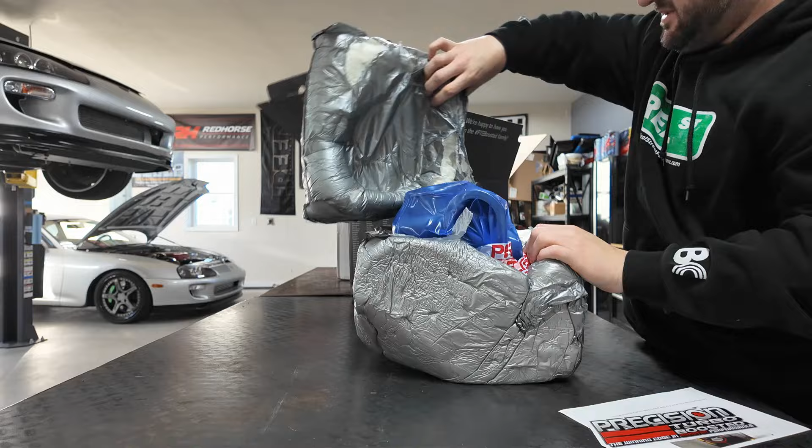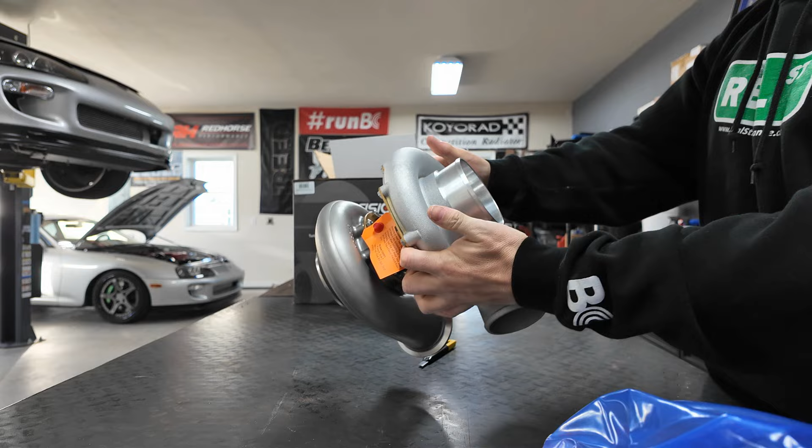Big old box with a Precision in it that won't cut open because this knife is dull. And I probably need a new one. Why won't it, what the heck? Oh, is it glued too? Boy. Set that down nice like.

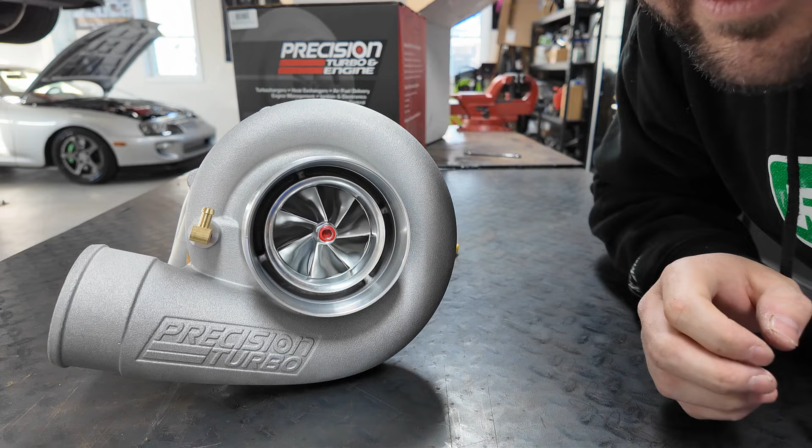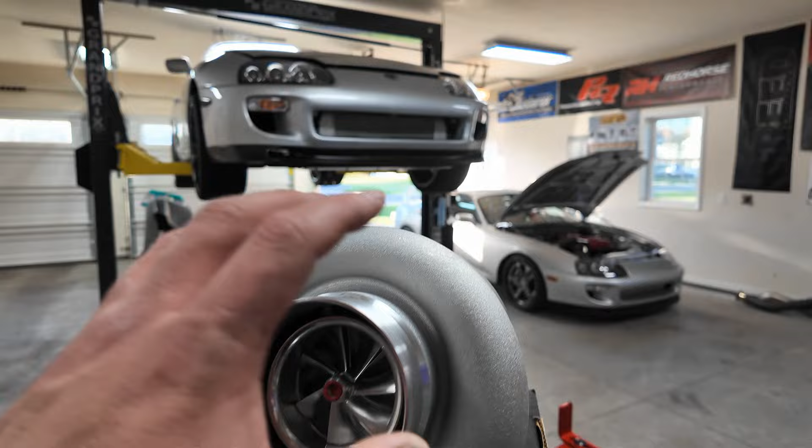See that right there? See that? That is my new 6870. Sheesh! So here it is, guys. Precision 6870 using a 0.96 exhaust housing here. As you can see here, what's coming around this side right here, this is a V-band setup. Very, very excited to get this on the car and try it out. Oh man, I'm just ready.

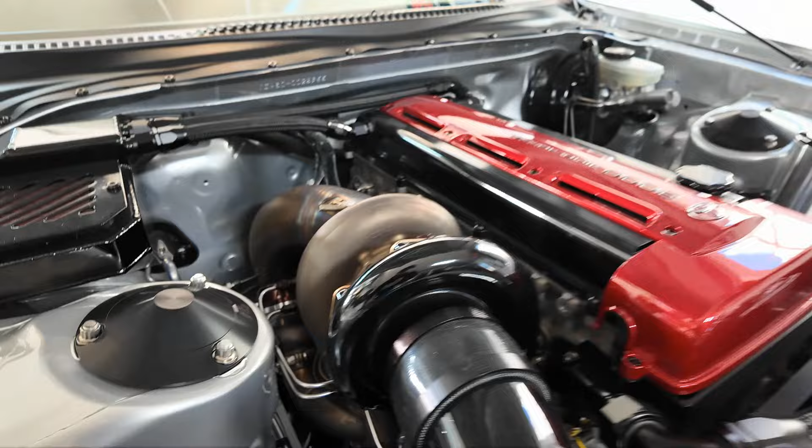Again, it's going to be very similar to what I currently have in the Supra. This is going to bolt up to what I currently have. So if we come over here, it's going to be very, very similar. This is the same style housing. This is an H cover with the same rear housing here, 0.96, but this is a 7675 Gen 2 versus the new one is going to be a Next Gen.

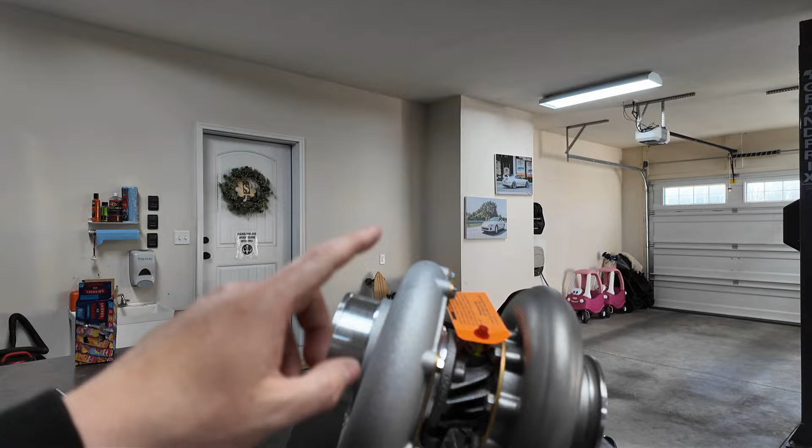Now, power rating. This is rated for 1300 horsepower. The new turbo is actually only, I love saying this, only rated for 1200. So I lose about 100, but the new tech allows for one, it's much smaller, so I'll get way better low end. And apparently this is pretty well on par with that. Again, it's not quite up there. Goal is to make just 1,000. I was making a little bit more steam there when I had that car on 40 PSI, but this is awesome. I'm pumped for this.

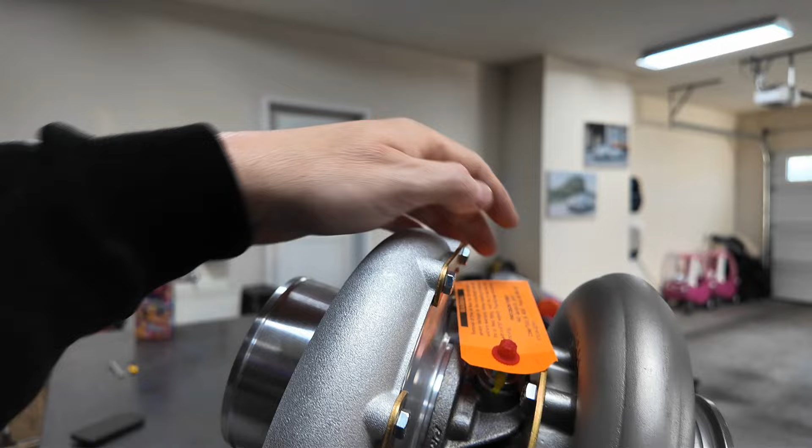So look at this. I cannot wait to get this on. But housing's got to come off. I got to go get it taken down and get powder coated at Bagworks down in West Virginia. So I was going to take it all apart tonight, but I'm actually going to drive this car down there tomorrow and maybe talk to Rob and those guys down there and kind of go over a few things.

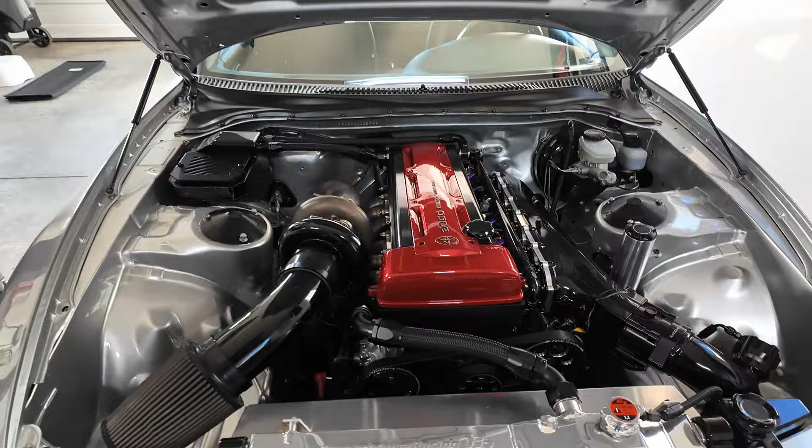Because, man, like this car, look at it. I absolutely love this car, and I'm actually loving this camera right now. This makes it so much easier.

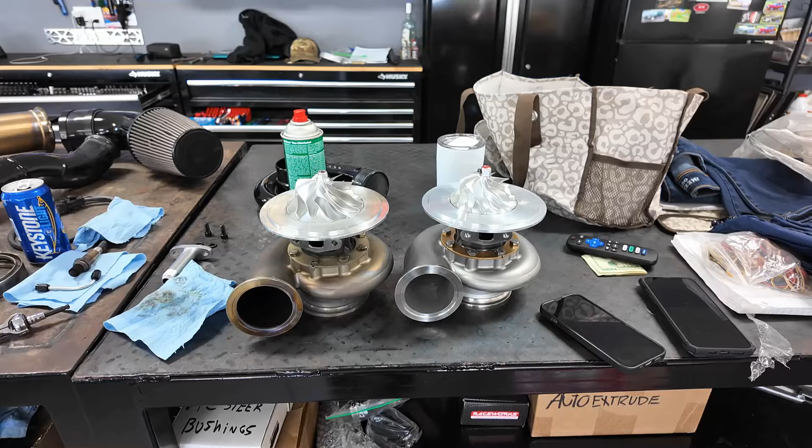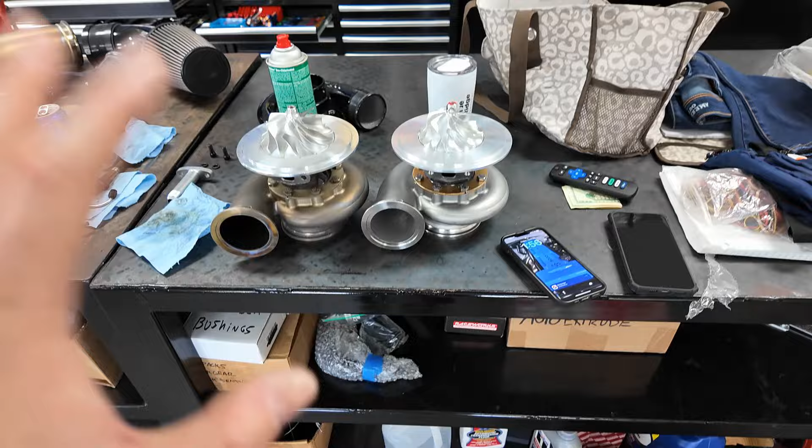All right, guys. So here is the two turbos. Old one, new one. The one thing I'm going to show you right off the bat here is, see if we can show you here, 0.96. I did not change the rear exhaust housing. Why did I not change that? Big reason is I wanted to have as much flow as possible to keep this eating up top. So I didn't want to sacrifice anything.

And I think that was a big reason why this probably didn't do as well. If I had downsized this it would have helped a good bit. But by keeping this large, I think it's going to help me keep it up top happy, without going too small. But if you literally just look at it here side by side, you'd see how much bigger this is. I'm just trying to see the difference in fin design, but it looks super similar to me, but they're saying this thing makes another 100 horsepower.

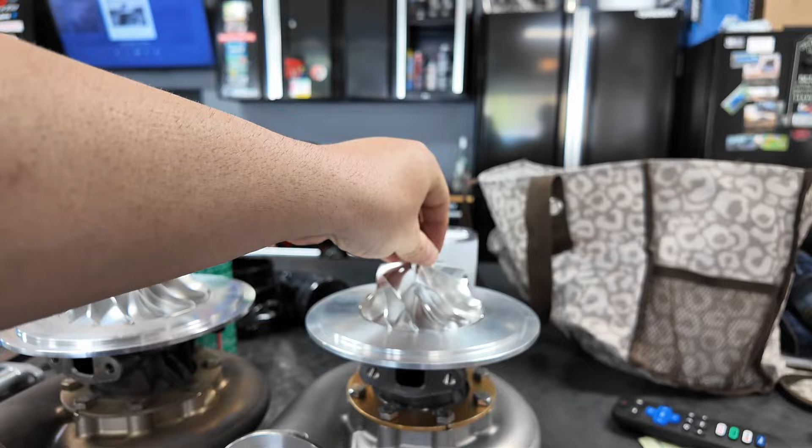So yeah, I mean, it's all very similar. Again, this all bolts up. The front housing is a little bit different. I just dropped that off, obviously, with Rob down there at Bagworks. So yeah, the port's even still a square port on both of them.

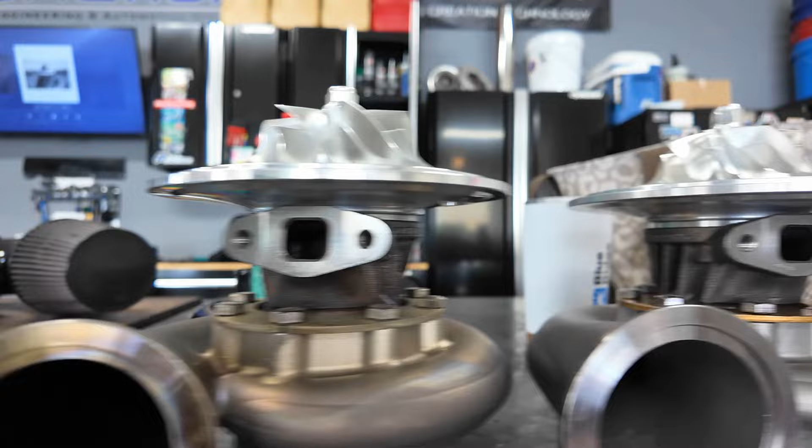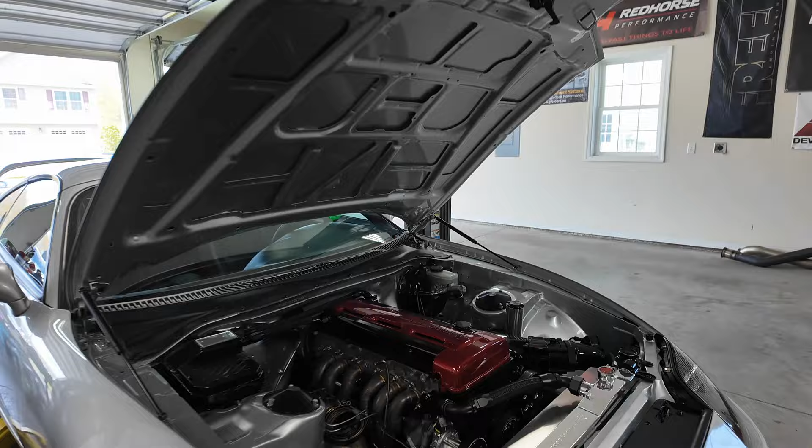So yeah, I mean, they say the center section is a little bit different, like the fin design, but it looks super similar. So I'm gonna go ahead and bolt this up, get it ready, get my downpipe, everything else back on. It's cool. You can see the Powerhouse Racing header here. Must have had like a baby leak from something, but I think I'm gonna clean some of the stuff up while this is all off too.

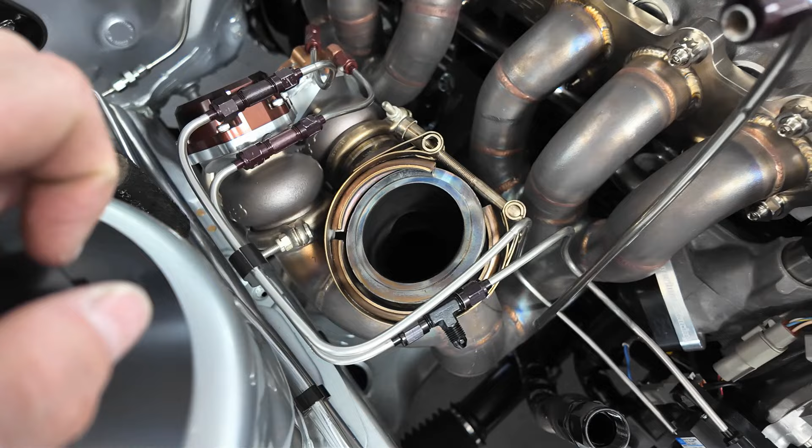But yeah, you can see my one Go Fast Bits wastegate there, getting a little bit of heat in it. I mean, yeah, she got a little toasty, but no leaks. What I like is this right there. See that? See, no leaks around that V-band, which makes me happy because everyone says V-bands leak, this, that. Male to females never leak. That's why I like that design. So I wanted to show that there was no leaks at all.

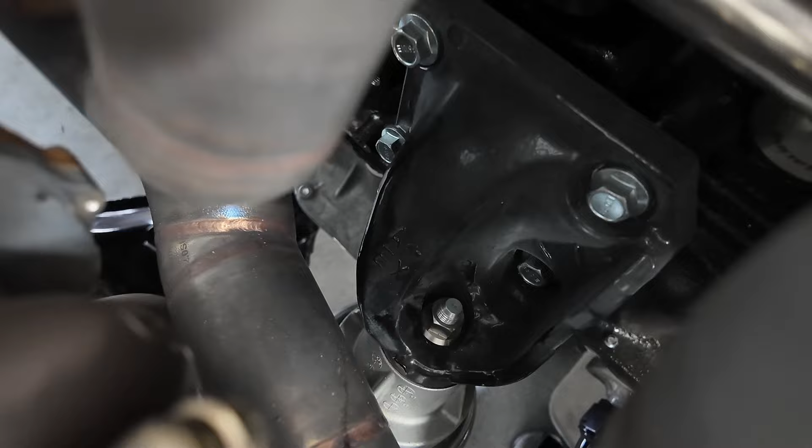Makes me super happy. But again, I'm going to get my brush out here and clean a few things up while I've got access to it all and clean up that engine mount, which you guys, can you see it down there? Damn, the low light on this is 10 times better than my old camera. Got a little crusty just from being down there. I got 6,000 miles. 6,000 miles on a quote-unquote race engine, and it hasn't skipped a beat.

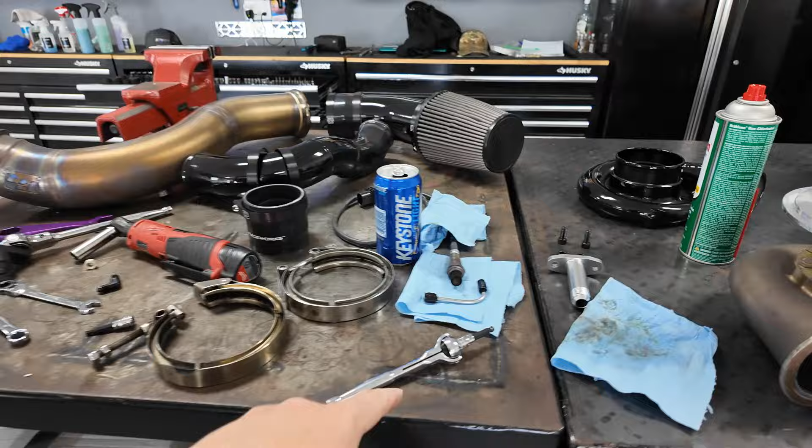Tom Barbosa, you the man. This thing is awesome. Drove it today. Drove it down to take it to VagWorks. Like, this thing is just, it's so reliable. You hear for years from people hating standalones, everything else. I've been very fortunate. So anyways, I digress. I'm going to put on my long drain neck here, get everything bolted up, and get it back on the car. All right, so I'm headed down to VagWorks right now.

I've got this new microphone on my lapel, or I guess whatever you call that here, and I've got the window down. So just curious how this works. I was going to use the internal mic inside this thing, but I don't think that was going to work out. So I'm hoping this smooths everything out. Again, it has a built-in gimbal. But yeah, I just want to take it for a little ride, see if the window goes up.

Here's another fun thing. I never get to show you guys this stuff, but the window. I can't figure out if it's the regulator or if it's something else. Just for the fact that sometimes it works, sometimes it doesn't. I gotta click it down, click it up. If the door's open, it doesn't work, but if I shut the door, it works. So I'm assuming it's wiring or something dumb, but I checked all the wiring and it all seemed all right, but it's gotta be maybe a cold solder issue.

I want to replace the window switch. I was gonna have a gentleman named Josh Beaumont, I think that's how you say his name. He's down in Texas, but I found out you can buy the window switch still brand new for like 45, 50 bucks. So instead of even dicking around trying to fix what I have, it's like, screw it. For 45, 50 bucks, I'll just buy a new one and save myself some headache here. And again, this is the reason why I'm going down today too.

As you can see here, I live in the mountains, so it's just twisty and turny. We'll get some straight roads here eventually, but it's nothing like it is down south, not even close. Transmission's still cold, so that's why there's a little notch there. Once it gets a little bit warmer, it'll be better. I had really thick fluid in this, and it was bad. Now this isn't horrible at all, but yeah, I'm just excited to get this thing powder coated and see how this looks when it's all done. I'm ready to drive it with the new turbo. I wanted to drive this down though, just because it's a beautiful day, so I don't want to take it apart and regret it.

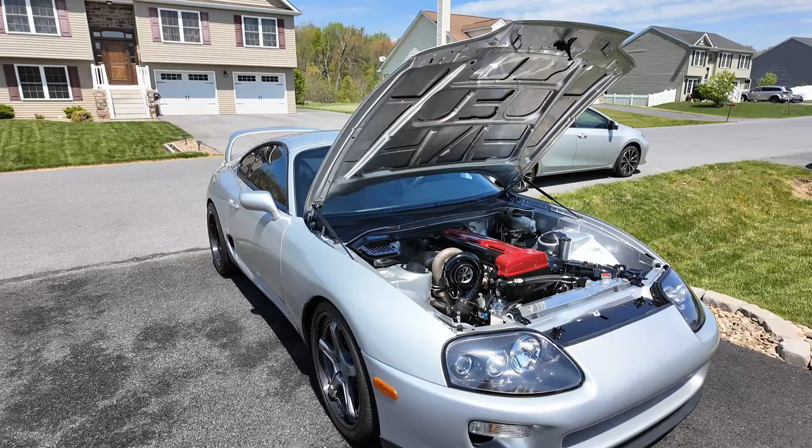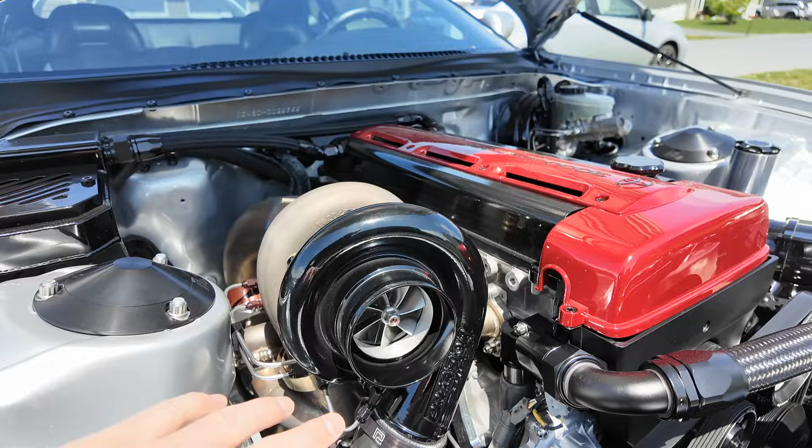Well, just got back from VagWorks there. Before I take the turbo off, I love when we did this, like, I don't know what you call this, but the full blackout. So everything inside is the reason the new one's not going to have this, for the fact that I'm eventually going to get it machined. When they do that, all this is going to get tore up or cut up. So I didn't want to do it yet. I'll probably take it back and get it repowder coated, but I at least got to have it black, because I love when I go to a show, I always take the filter off and it just looks better. It takes a lot more.

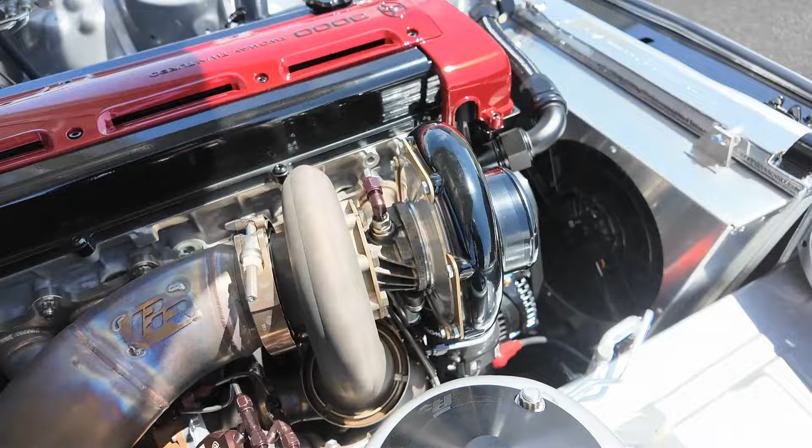It's a real pain in the ass. He even said too, he's like, dude, it sucks doing it. So I was like, yeah, this time around, don't even worry about it. But yeah, about to take the turbo off, but look at that. V-Band is so much nicer. I can't wait. So I'm gonna shut up. Let's pull this car inside and get the other one out.

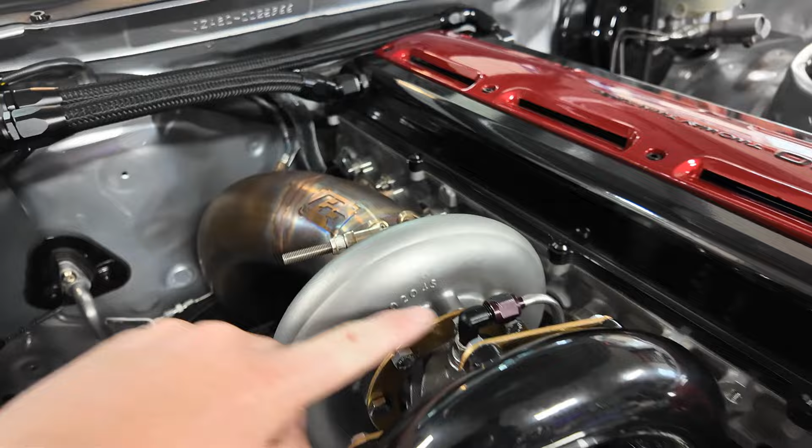All right, turbo is back on. I kind of like going back to this. It actually looks a little bit cooler here, but new turbo's on again. Doesn't look any different really, because it's like the same size. It's literally internally, so it's very similar. I did put a new fitting here just because over time aluminum can weaken. So I did put a new fitting on it.

Yeah, looks awesome. Again, this thing is supposed to be pretty awesome. I guess I'll start it up here. Already primed the turbo. I want to check all the bolts one more time, make sure everything's completely tight, and then let's go ahead and fire this old girl up.

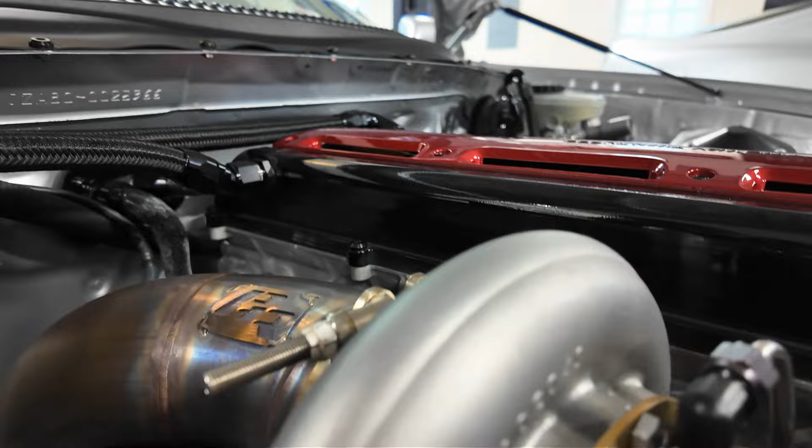Okay, but this is definitely going to burn off quick, so it's going to get a little smoky. All right, ignore the funnel here. I'm actually changing the oil. Try to change it every 1,000 miles. I know that seems excessive, but oil is cheap, in theory. I've got a ton of Toyota filters. Engines are not. So, changing out the oil, but I wanted to go over the turbo, and I'm going to go inside and go over how it is performing.

This thing is a light switch, guys. This is the street turbo. And maybe a 64, 66 would be even crazier, but it's going to fall off even more up top, which is something I'm going to talk about here today. I'm going to try and remedy it, but I'm going to have to go inside and show you guys that. Just to give you perspective though, I'm hitting 36 PSI at 5,000 RPM with an unideal setup. For a low range car, you'd want smaller cams and everything else.

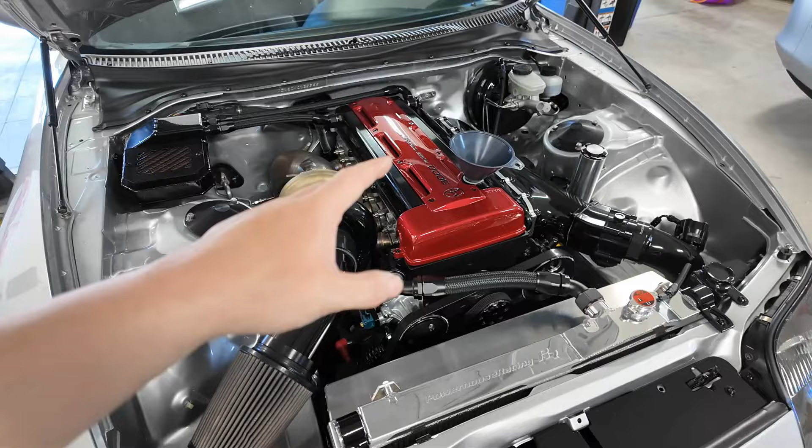So I'm running an open scroll manifold with a V-band, pretty much open scroll. I'm running large 276 cams. This has a high peak and lift. I'm running a large manifold, large plenum with a short runner. Again, high peak, not low. Large intercooler piping, large intercooler in itself. And I'm running a large exhaust housing, which is good for top end, and 4-inch exhaust, which does help there, but not perfect.

36 PSI, 5,000 RPM, meaning that's hitting my target. It's probably making about 950, 1,000 at that. So the goal is to hit 40. Maybe I can go a little bit higher. 40 should net me about 1,050 in this; I wanted over 1,000. I'm going to get on the dyno. Might have to play with timing a little bit. One thing I'm noticing though, it's falling off up top again. I'm not going to get too much into that here because I want to go inside and show you guys the logs and explain that a little better.

Before I go in though, I have to explain, when I get on it now, the car picks up like it's just brum, brum, brum. Before, every time I shifted, if I didn't shift really high, it just wasn't a great powerhouse. And the one thing I would say, up top, it definitely doesn't steamroll. It does, but it doesn't. You know, 90% of people get in the car, if I take a video, you'd be like, good Lord.

But I can tell a little difference just for the fact that I took the 7675 off and put this right on, so I can tell the noticeable difference, but it's very minimal. Obviously the other turbo is worth another 100 horsepower. This is 100 less, but I feel like this gains a lot. Nothing wrong with the 7675. The 7675, I've got it here, 7675 Gen 2 with a 0.96 V-band housing.

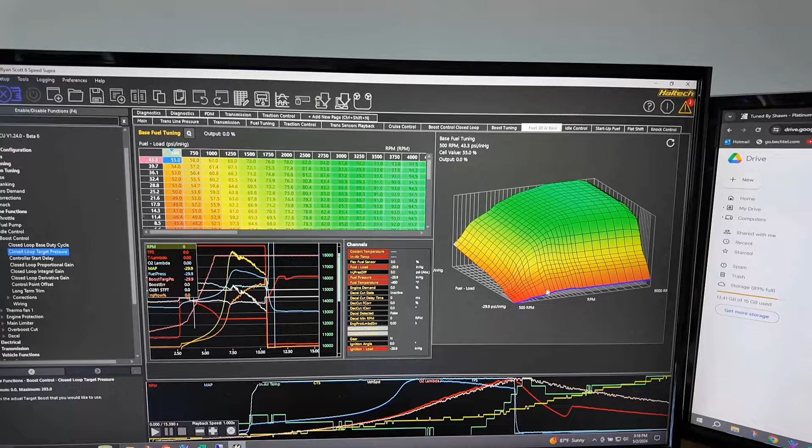All right, guys. So let's go over a couple of things here. So this is my boost tuning page. I made this, that's why I like Haltech. AEM does it too, but I made a couple like this one. Here's my fuel 3D base, I call it. So when I make base fuel, I like being able to see the map versus also the physical fuel load map here. Then I have a few things in here that you want to check when you're checking for fueling. But I digress. Let's get to the boost tuning page here.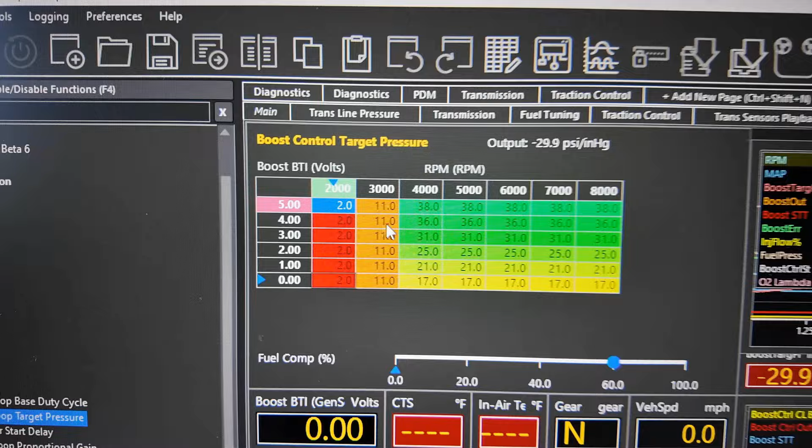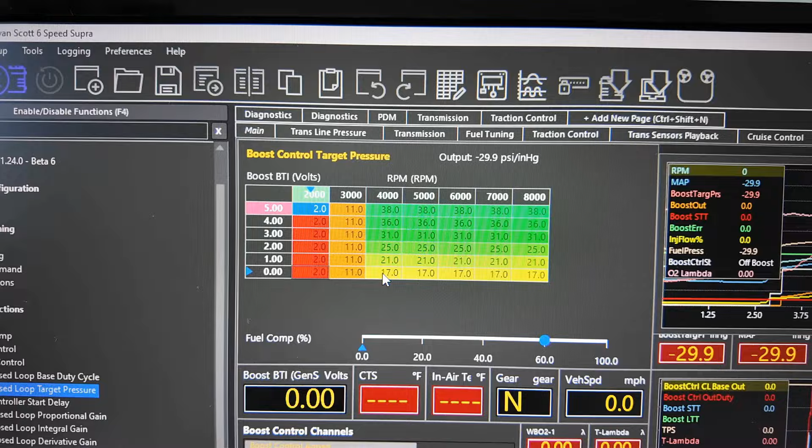So we come up here to the very top, see if this focuses for y'all. But up here, this is my levels for my BTI gauge, which is my switch. So you got 0, 1, 2, 3, 4. 0 is pretty much gate spring, which actually my gate spring is like 15, but this is pretty much set. So if I just want it as low as I really want it, or like 93 pump gas, which will switch automatically. 21, 25 is like the low if I'm letting a friend drive or something.

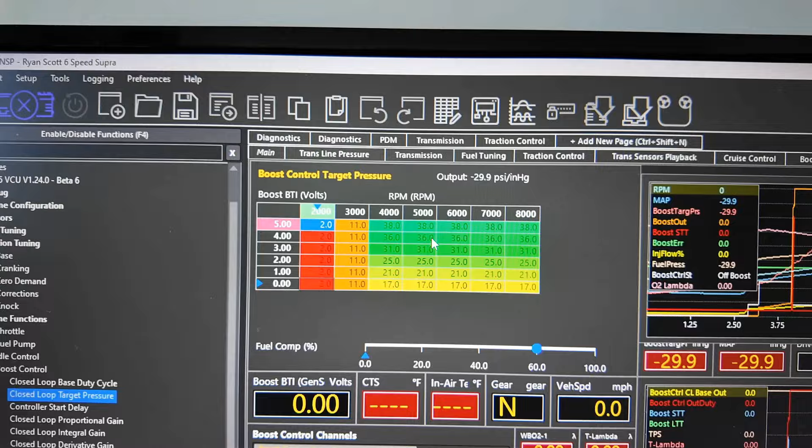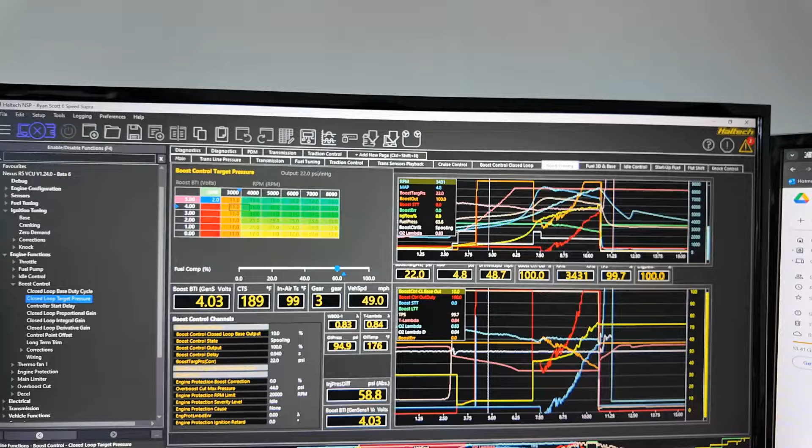31, I really like it at that level. 36 is really fun. And next up is 40. I don't know why it's 38 there. I just uploaded a new one, so this must be the old map, which it is because it's my old log. But let's go over this here. So let's do this. Let's window over it. Oops, so if we can see down there, we window over it all. Makes things a little bit tighter.

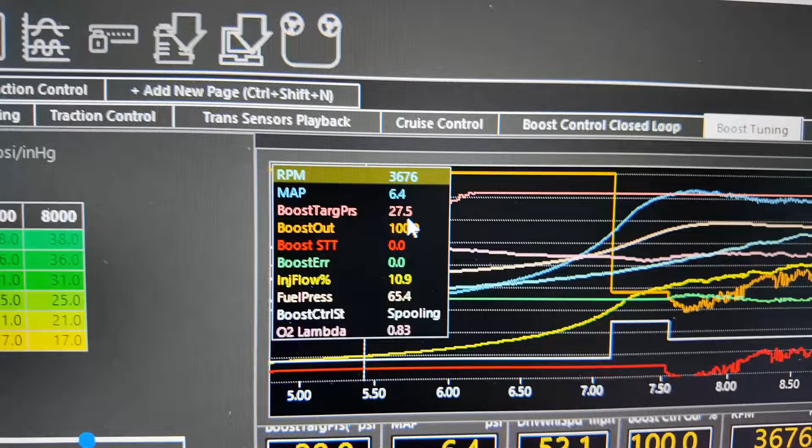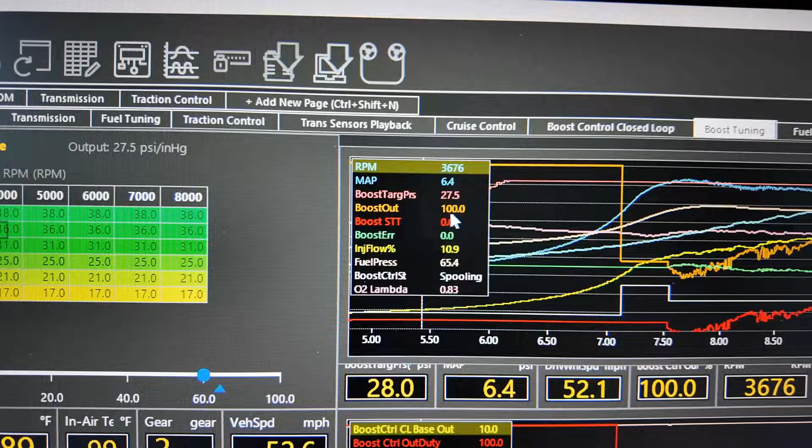So let's come in here. We'll look up top here. So as I drag this across here, you'll see we've got RPM, we've got MAP, we've got our boost target. So as it comes up, this target will go up, and that's what it's telling us we want to go to. I'm on level 4 with this. Okay, so obviously we're targeting 36 PSI. So boost out is the physical MAC valve saying the amount of pressure percentage-wise going out. This short-term trim, this is the boost error, meaning like, hey, you're trying to hit 36, but the error is either negative or positive of that.

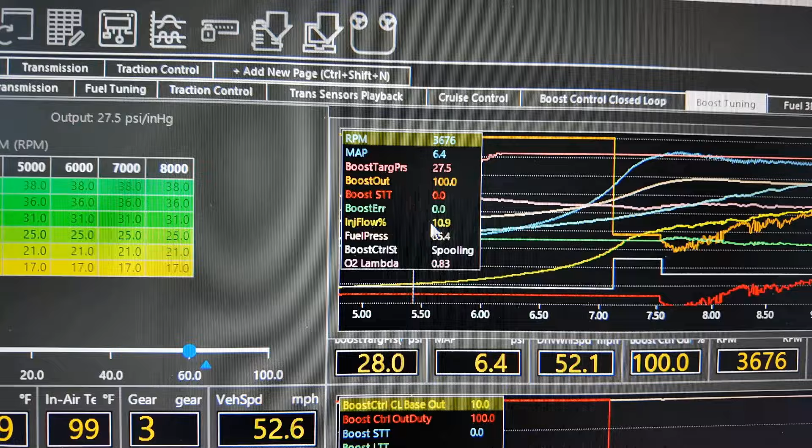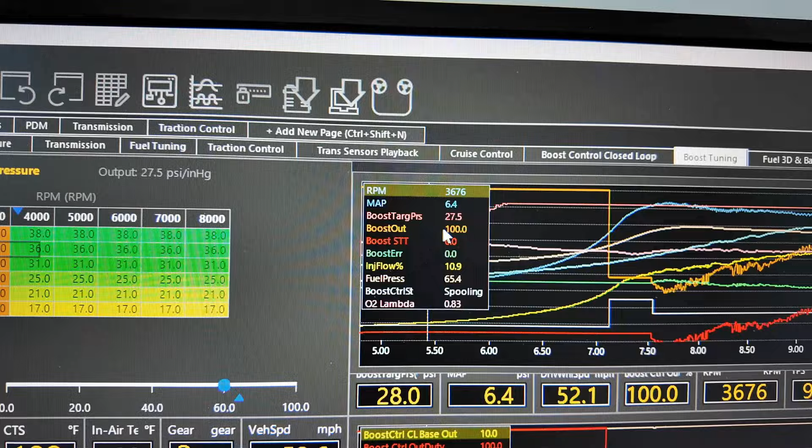And the injector flow is your duty cycle, fuel pressure. You'll see that actually either trail just like a half a percentage or actually go a PSI above it. O2 lambda, and then spooling means this is boost control out saying what it's doing. This spooling means that it slams the gate shut till you get close to your duty cycle you want to get to, which helps keep everything getting there faster. So we'll start here down below.

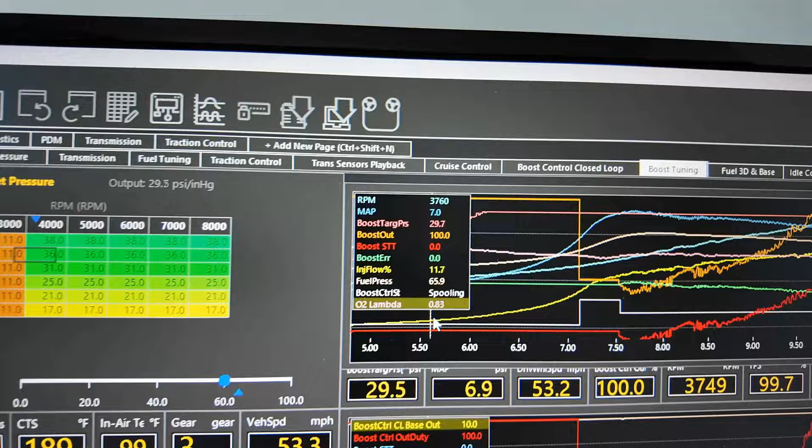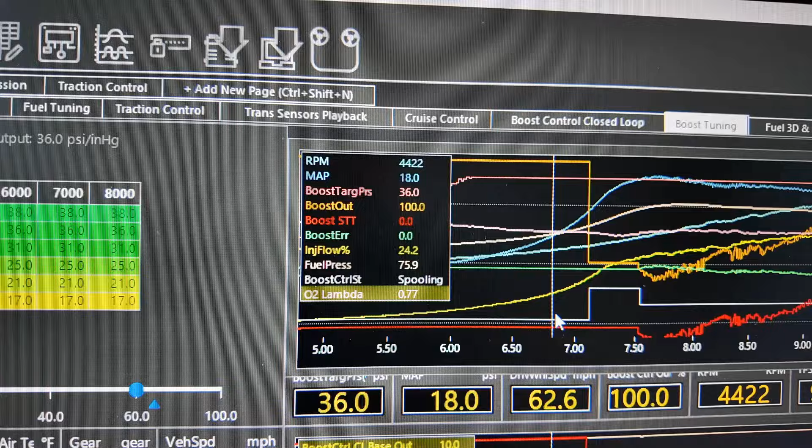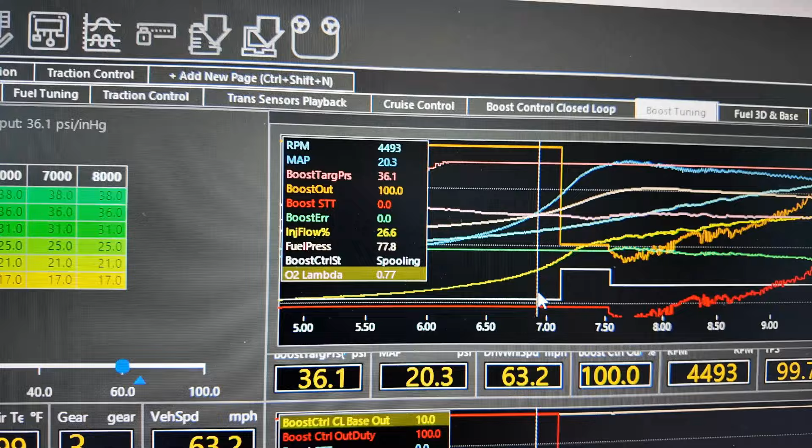We can see like 3,700 RPM here. It's 3,700 RPM, we're at 7.0. So at 4,000 RPM, we have roughly 10 PSI, okay? As we go up, let's get to 4,500. At 4,500 RPM, we're at 20 PSI. That's pretty amazing. 20 PSI for a bigger turbo is awesome. See, my target lambda is on point. My fuel pressure is on point. It's a little bit trailing behind, but nothing crazy.

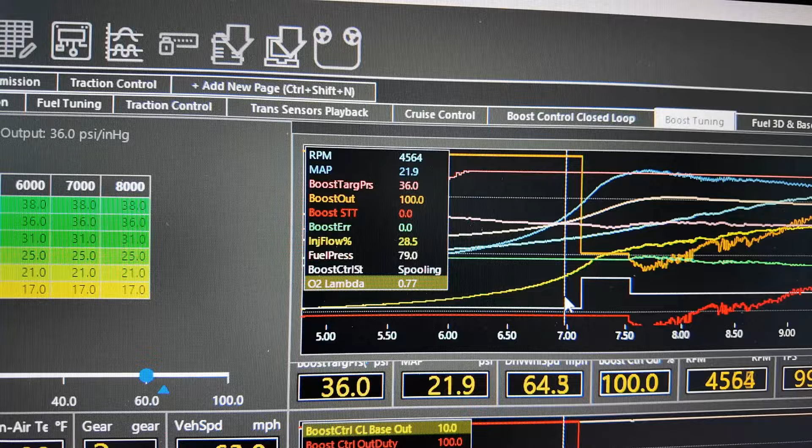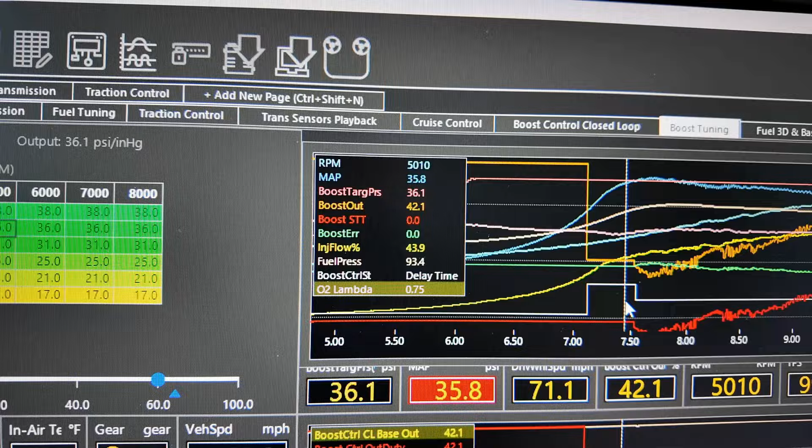So if we go up here at 4,700 RPM, we're at 30 PSI. So from 4,500, in 250 RPM, it goes from 20 to 30. And then from 30, which I think I need to add a little bit more base, you can see here to 5,000 RPM, I hit 36, which is absolutely absurd. So it hits boost and gets up there that quick.

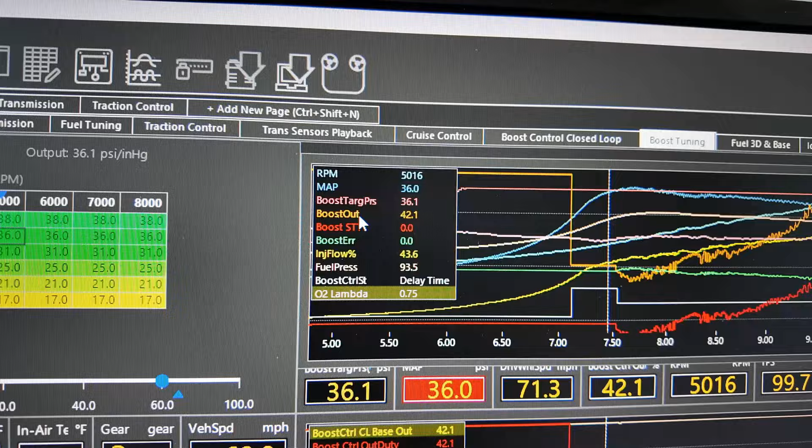Now, the one thing I'm having is this. So click off of that here. Whoops. You'll see this here. So our boost out is this line here. This little squiggly line here is our boost out. And you'll see it's going up, up, up, and maxing out. You'll see my short-term trim, because when I was tuning this, I didn't know how close it would be.

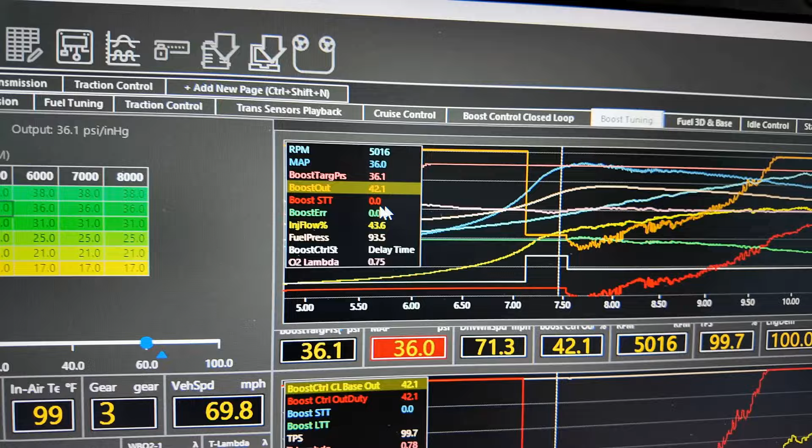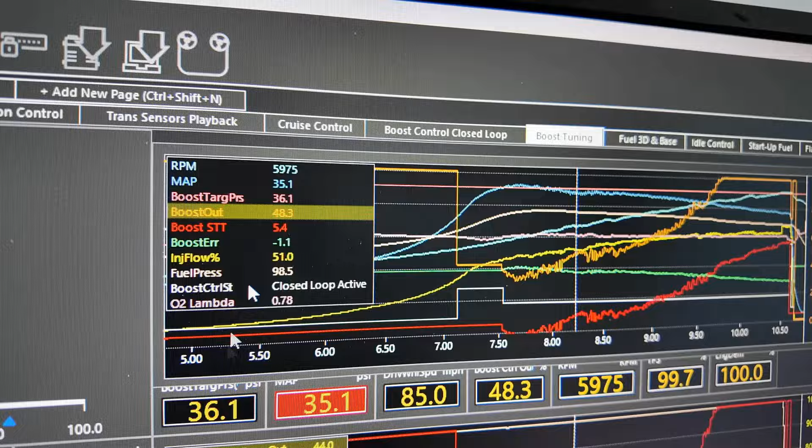But we'll come across here. And as you can watch, so watch in the left-hand corner, as we're going up here, you see the short-term trim, this is positive value here, see 5.4. It's adding more in because we're not hitting target. Target's 36.1, we're a PSI off. And as we go up, it's not keeping up. It's doing okay, but it just needs more gate pressure, which I did fix.

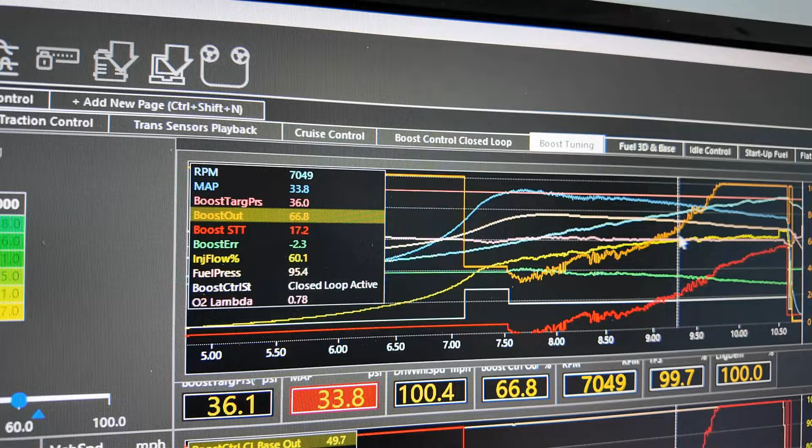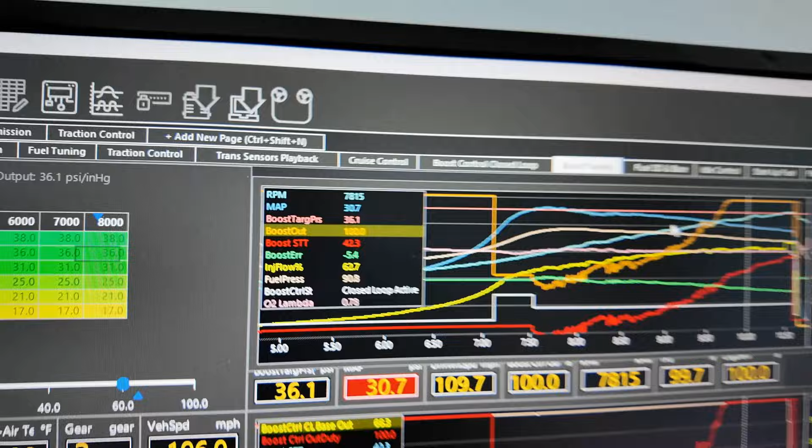But once we really get above 7,000, you'll see here, it's going to really jump up. And 75, you'll see it's damn near close to 100%, meaning the MAC valve, the boost controller is doing everything it can, but yet it's still bleeding off, which is a couple things. I don't have a back pressure sensor. So as we come up here, we'll go the whole way out. 8,000 some RPM here. You'll see 100%.

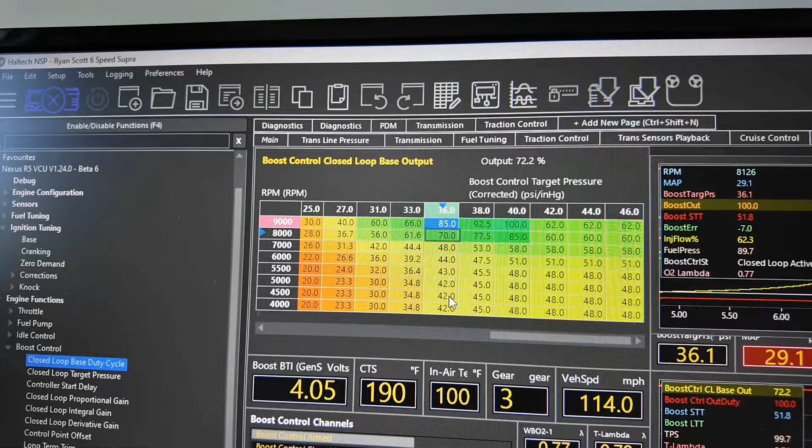It just can't work. I need to put a back pressure sensor to see what the pressure is to make sure of that. The other thing with it is the 3-port is not keeping up. It's usually double. It's a 15 PSI spring and I can hold about 31. So I'm doing pretty much what it says it can do. My old turbo is a little lazier, so it can actually efficiently do it. But this new one is not allowing that. So I can either go to a 4-port, dual 3-port, or put a 20 PSI spring in it.

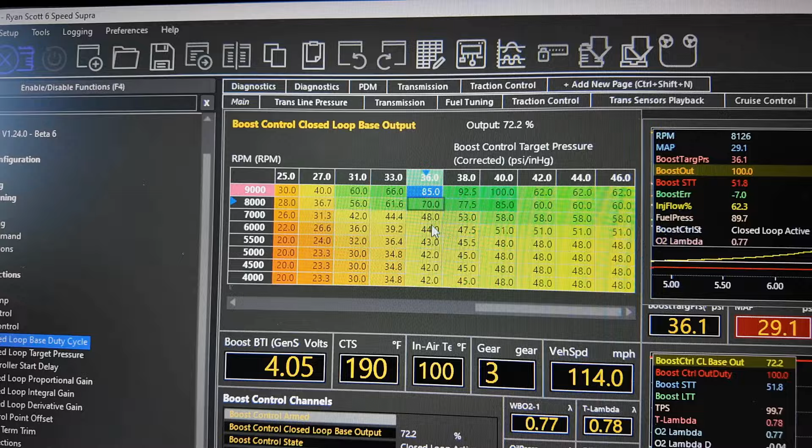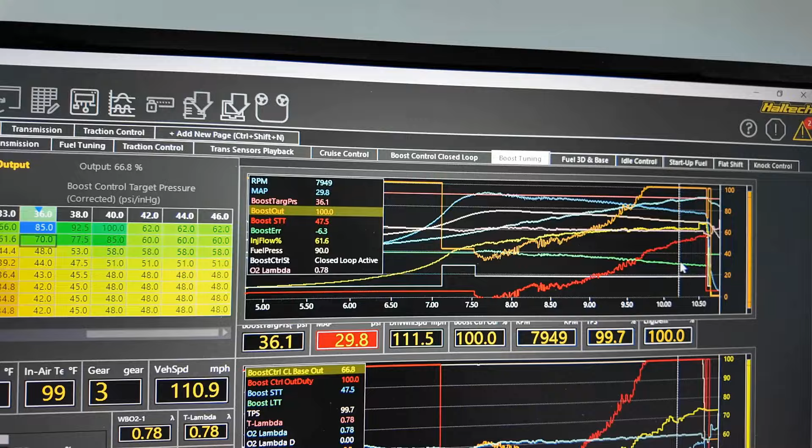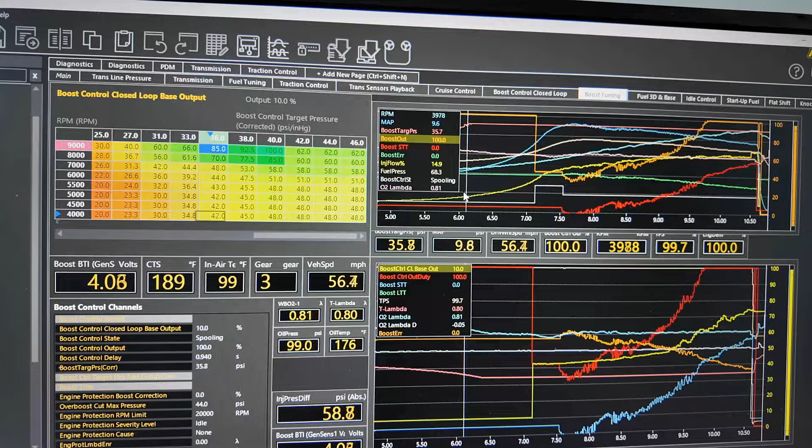I'm going to try to make one last pull with 100% here, see how it does and carries. But yeah, you can see here, the last, not 7,000, but 700 RPM. It's at 100% and it's trailing off right there, 29.8 PSI. Like it just can't keep up. But the car gets on boost so fast. And again, you don't need to rev as high now because you're getting into boost so much earlier.

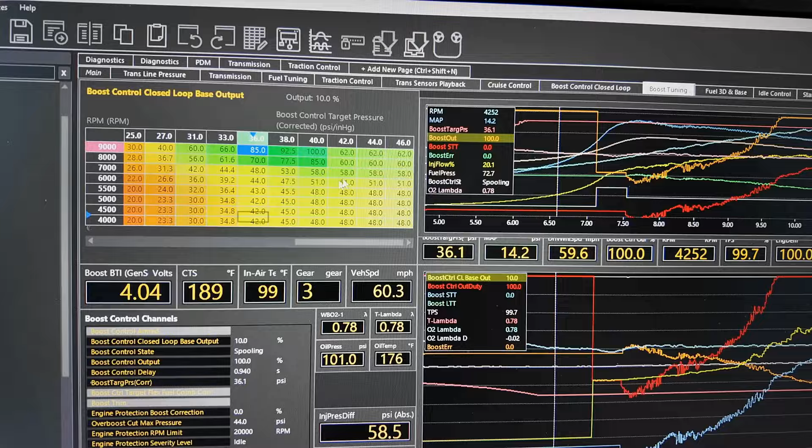And again, I think if I put a 4-port on it or just put a 20 PSI spring, which should net me 40 PSI, I think this will alleviate it. That's my personal opinion, but I'll have to give it a shot. The only downside is I have to remap all my boost settings again because all this base is now different, right? You do a gear pull in that PSI range. So 15 PSI is my base. My new base would be right about here in between 19 and 21 at 20 PSI.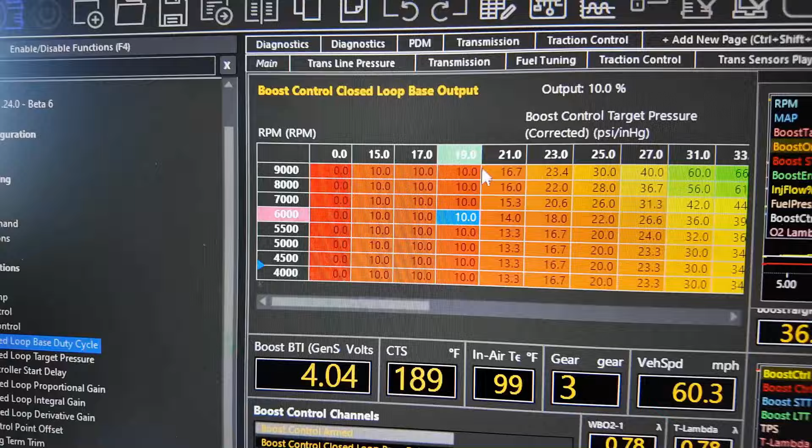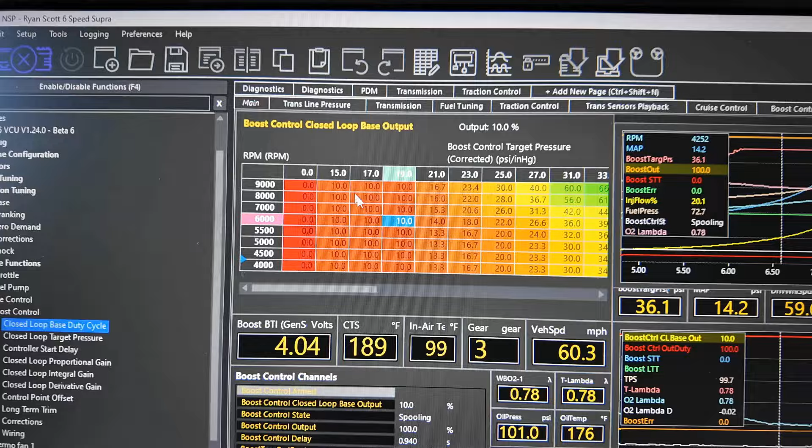So I'd have to redo it, and I most likely realistically can't run 93. I could run really, really limited timing there, but I just don't even want to chance it. I don't even really like running 93 unless I have to. And I pretty much try to run it low, 15 to 17 PSI just to get the car up and moving. But yeah, just wanted to explain that to you guys.

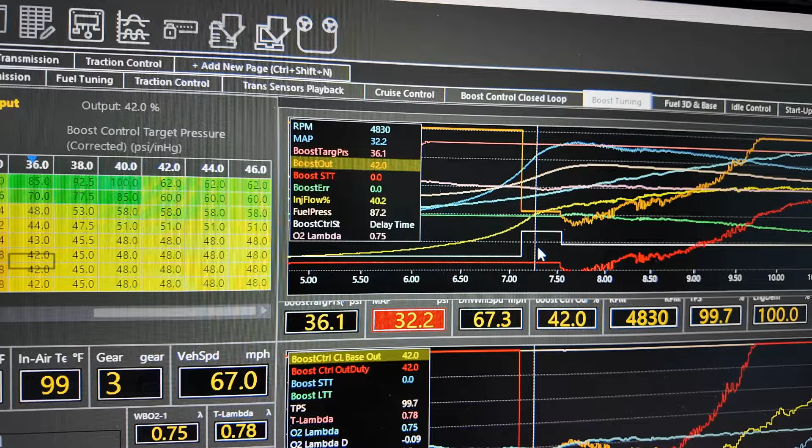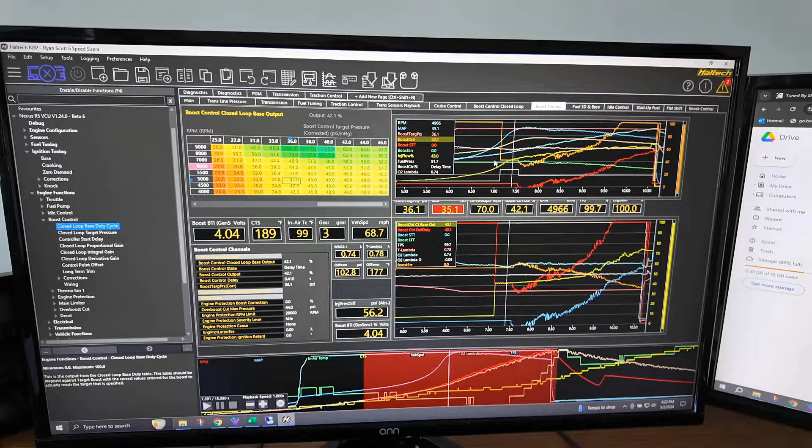This turbo is amazing. Again, we have full boost or 30 PSI at 47. Let's go back over here at 4,700. We're at 30 PSI. Ooh, there we go. 30 PSI, and at 5,000 RPM, we are at that 36 PSI. I'm assuming like 5,100, I could hit 40 PSI, which I'll make one more pull here. But yeah, very impressive turbo, 6870 NexGen with a 0.96 open scroll. It's mind-blowingly good. So I just wanted to give you guys the skinny here today and go over all the gears. So I hope that detail helps you a ton.

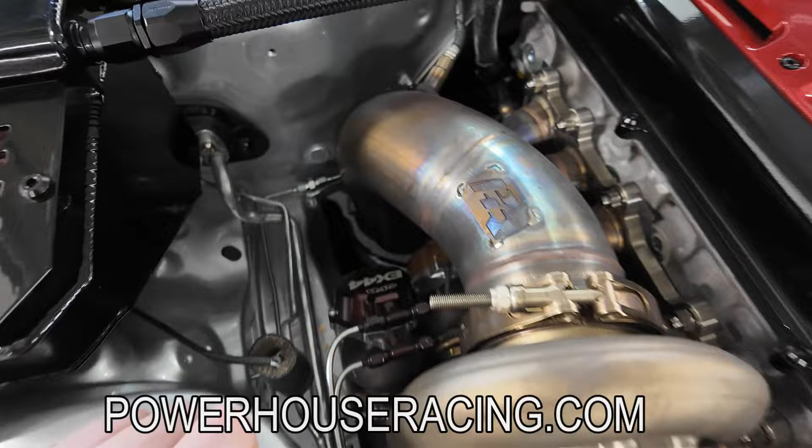I'm more than happy with this setup now. It just picks up better, the gearing and stuff. It's all dependent on what and how you want to drive your car. For me, this is ideal. The only thing I could say possibly is depending on your tire size, you might want the longer gearing with the smaller turbo now, but I personally do not because it's just too long for me. And that's with a 26.5 inch tall tire.

Maybe if I went to a 28, I would say this is even more ideal, but I think for what I want, how I want it to act on the street, this is like the most ideal setup. 410 gears, T56, 6870. It all works. It looks good, sounds good. This is, mwah, it is perfect.